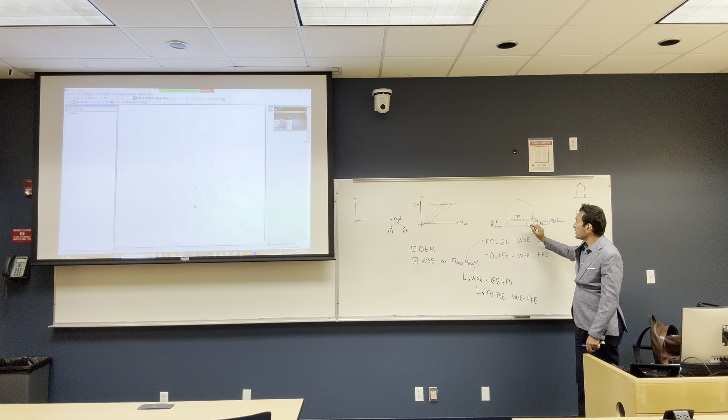But if the building has a crawl space foundation, that means there's a space here, so the ground elevation is not like the finished floor elevation. Sometimes people put mechanical systems here, like the AC unit, or the pipes and electrical systems. So there's a lot of components below the first floor elevation that you need to capture in the damage, so usually we make the flood depth measured from the ground elevation.

Okay, so if you have a crawl space, the flood depths need to be measured from the ground. But if you have a building on a slab on grade foundation, that means the FFE is the same as the ground elevation, and you can still use the FFE, right?

So this is just showing you what you should do when you do a vulnerability analysis, but the main idea is what hazard intensity are you dealing with? You have to look at the map that you are downloading - is it elevation or is it height, okay?

All right, so last time I showed you how we talked about Galveston, right? Do you guys remember? There was an island. Let's get back to it.

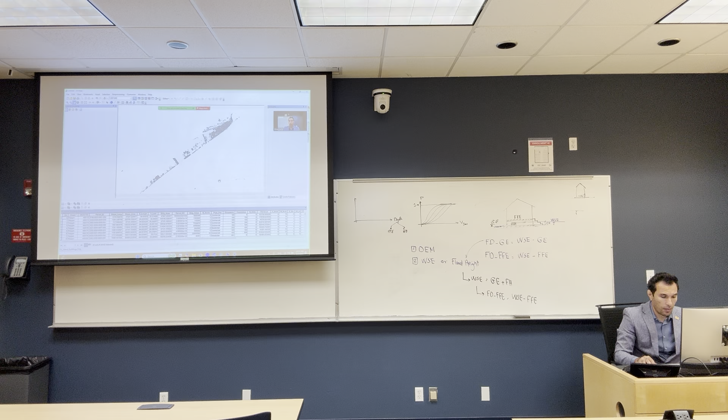Okay, so let me record this screen again.

Right, so I was about to put a base map here just to know the location of the buildings. Basically I go here and add data, and I add a base map, and I'm gonna add topographic maps.

And I was about to say that you can do the same thing with... you guys can see this, so I can do the same thing with ArcGIS Pro. I can drag and drop my shape file, so I can go here and drop my files here. Or basically you can add the data from here and choose the location of your data. So you can go here, add data, and then maybe you copy the location of your folder.

And I can come to ArcGIS Pro here and put the location of my folder, or I can browse the location of the folder, but I usually find it much easier to copy where the folder is at and put it here. And you pick whatever shape file - basically we want the Galveston Island buildings polygons, and I can say okay, and it's gonna get loaded.

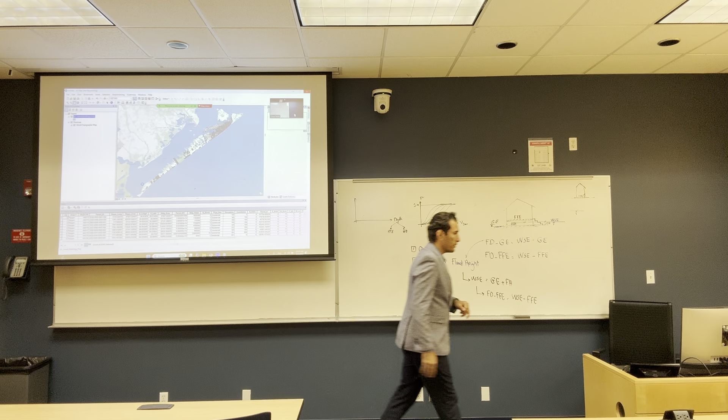Polygons are good for everything, but usually in analysis we need every building to be a single point, so that's one thing leading to a good discussion. Let's say this is your hazard map with pixels, each having a specific flood depth. But buildings aren't points, usually a building covers many pixels, and each pixel has a value. If you want an accurate flood depth, you have to account for all the flood depths around the building, if you want that level of accuracy.

But usually the pixel size, if very high resolution, is like 0.5 meter, and the building might be 10 by 10 meters or 12 by 12 meters. Some people take the average pixel value at the building and assign it to the center, but that's a lot of work. So for community level analysis, we don't have to go deep into pixel size. Instead, we convert the polygon into a point and extract the flood depth value at the center of the building, without averaging all the pixel values.

I'm going to show you right now. First, let's convert these building polygons to points. Let me zoom in, maybe here at the downtown.

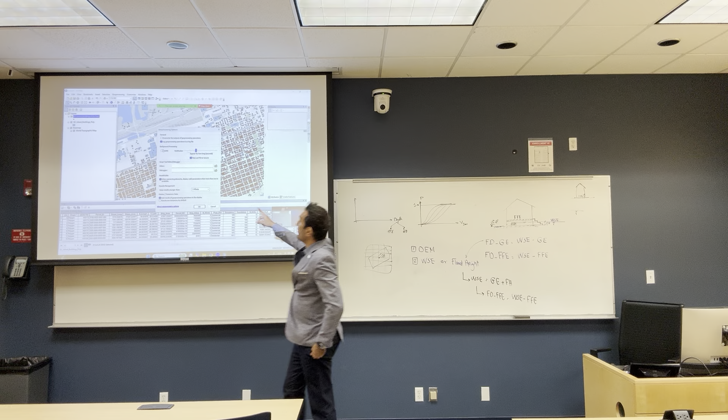If you want it to show up, go to, I believe, customize, and there's a geoprocessing option. If you click on background processing and enable it, the processing is done in the background and you won't see it, it will only show a progress bar. But I have it unchecked, so it shows me how the processing is going. So you have to uncheck enable here for it to show up.

Anyway, right now I have every building as a single point. Let's get to the hazard maps. I have multiple hazard maps for Galveston County, and these are based on Hurricane Ike in 2008.

Let's go to the raster maps. I have multiple raster maps, like one called Ike maximum flood depths. What do you infer from depth? Is it elevation? No, it's depth, right? So this flood depth is definitely measured from the ground.

The second one is called Ike maximum... why is it from the ground? Because it has depth, and depth is always measured to the ground elevation of the map, from when the map was developed. So when we have depth, it's measured from the ground by default.

Look at this one, it's called maximum flood duration, measured in hours. So depth and elevation don't matter here, it's going to be like 20-hour or 100-hour flooding.

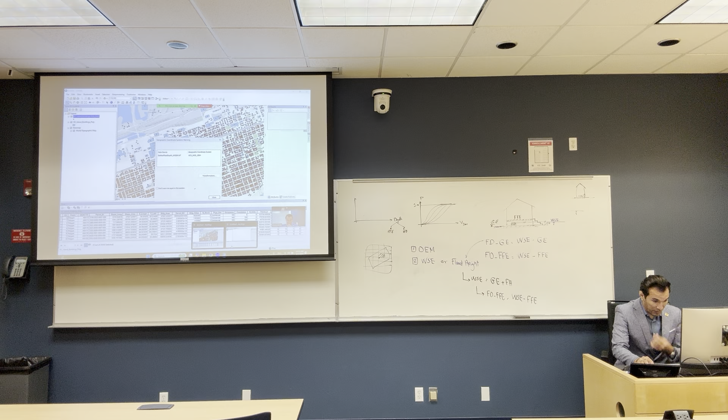It's going to take a minute to load. Let me close this so we can continue. All right, here we go.

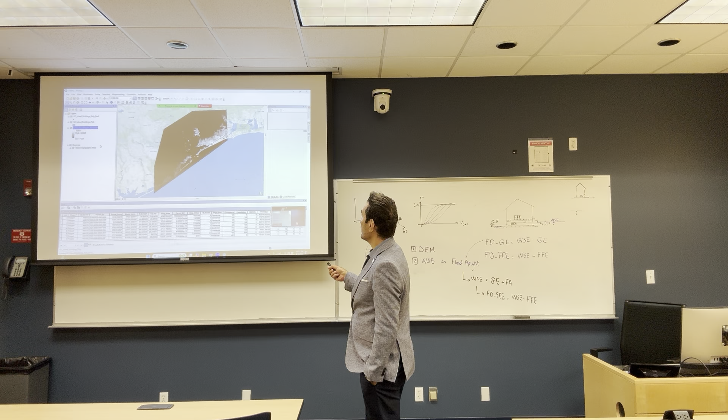Look at this, I'll zoom out to this layer and you can see the extent of the hazard map. It's covering maybe the entire county. Can you see? Here's my community in this area, and it covered this whole area. This is the boundary the coastal engineer made when they provided me this hazard map, but I'm only interested in this area.

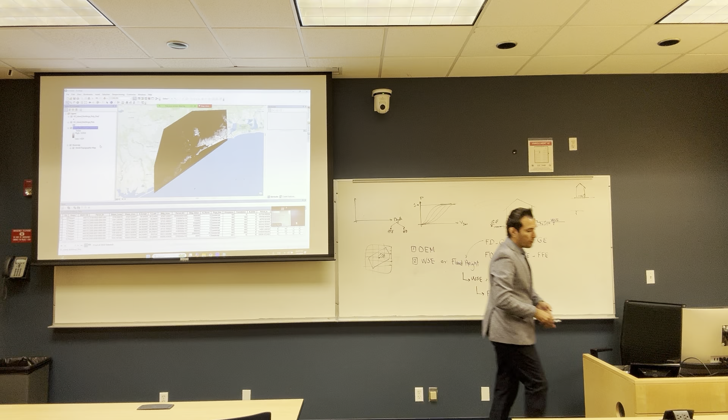It's black and white right now. When you load a raster map in ArcGIS, it always becomes black and white. If you want to change this, you go to the symbology of the hazard map. Like here, I click, and you can change it to whatever you want, like converting it to blue, which is more representative of how the flood looks.

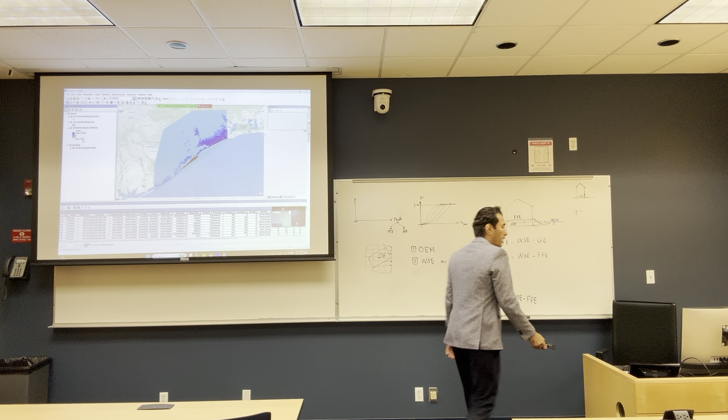The darker the blue, the more the flood depth is. You can also set the maximum flood height. So the maximum flood height is 5 meters, and the minimum is almost 0.

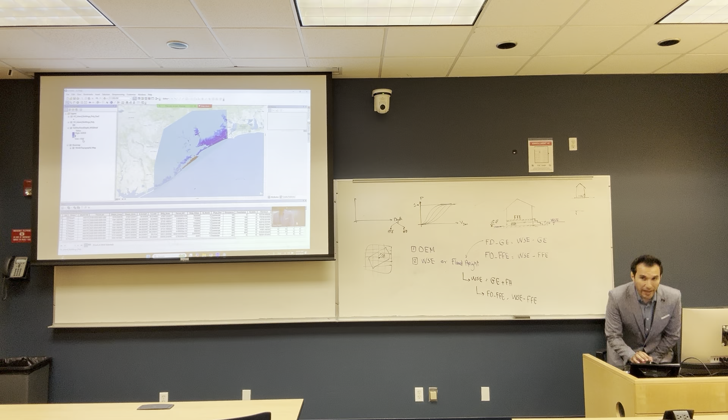Okay, so right now I have the building points, let me zoom in. By the way, my cursor right now is set to zoom in, like this tool. If you want to zoom out, you can use this tool. If you want to get back to the regular one, you can click on this one.

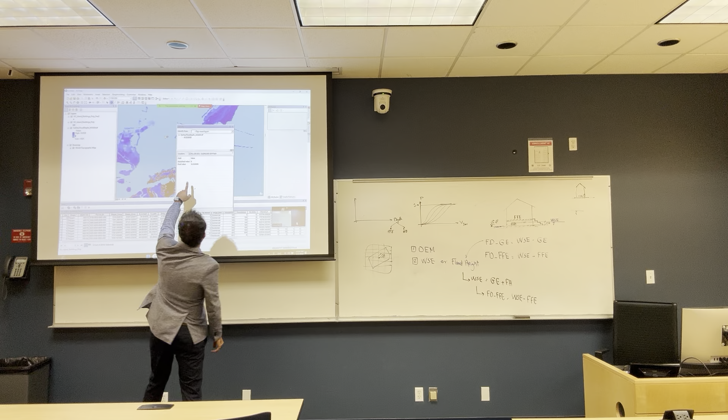There's a blue circle with an eye icon here, it's called identify. If you click on it and have identify active, clicking on any part of the map tells you the information there. Like, I clicked on the map here, and it tells me the flood depth is 0 over there. By the way, this is the flood depth, meaning this area has no flooding. If you click on a building, it gives you all the information about that building.

Let's zoom in to the downtown area, and I'll click on this polygon. Once you click on it, it gives you all the information about the polygon from the shapefile. So that's the identify tool.

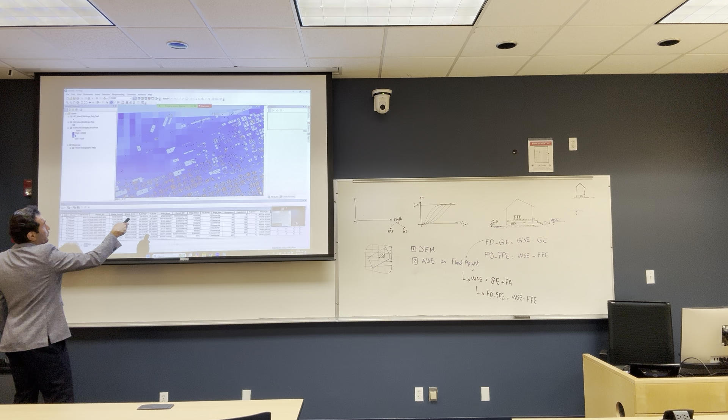If you don't want the identify tool, notice the pixels here, can you see them? The pixel is huge, a building can fit in one pixel. See this point? It's almost equally close to these 4 pixels, but when I extract the flood depth, the pixel that actually contains the point is the one that's used.

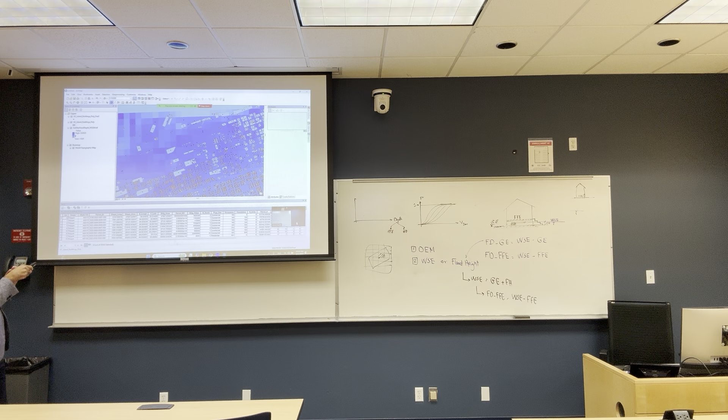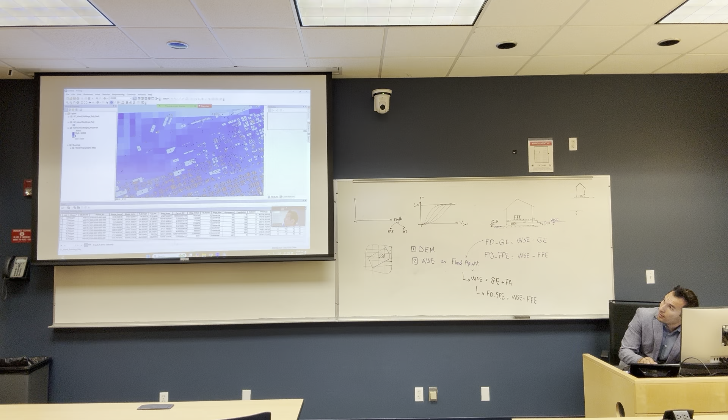So let's see what the flood depth is at this pixel. Where was I, which building? This one, right? If I zoom in, this point is in the middle between them, let's click on this pixel.

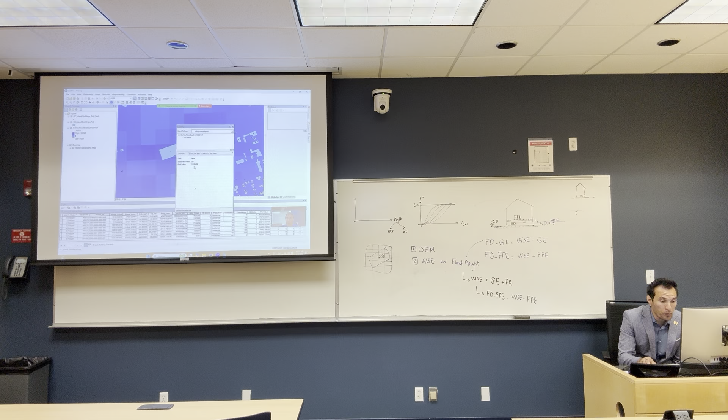This pixel has a flood depth of 2.49. This pixel has a flood depth of 2.51. So it's almost a 0.02 difference. This hazard map isn't 100% accurate anyway, so we can't demand that level of precision. It doesn't matter much whether you extract from this pixel or that one.

Okay, so let's say I want to extract the flood depths. I'll go to the shapefile and open the shapefile of the points. The last field in that shapefile is this one. When I extract the flood depths, it's going to add another field.

So I'll go to the search bar and type 'extract'. You'll find many tools you can use. If you want to be specific, I'll search 'extract point'. There's something called extract by point, extract values to points, and extract multi-values to points. What we want right now is to extract a value to a point.

If we want to extract multi-values, that means you have 10 raster maps and want to extract the value of each map to a point. For example, if you have a 1,000-year event, 100-year event, and 500-year event, you have a list of maps and want to extract the flood depths for each event, so you load all these maps into this tool.

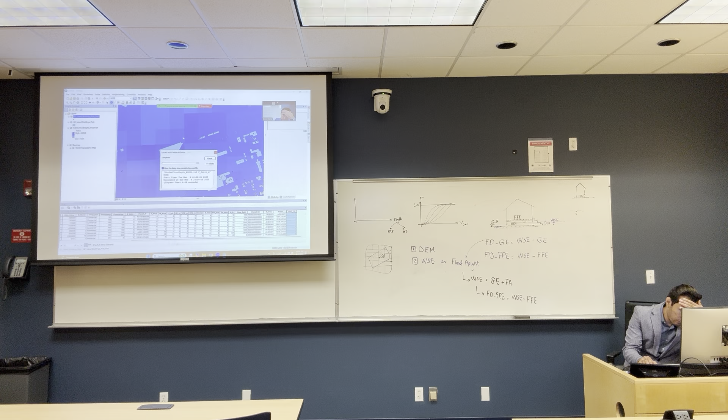Oh my god. It crashed.

I had to wait until it finished, and it finished. That's why you need to make sure to save every time you work on something, so that you don't lose the data. Anyway, let me see if I have this saved.

Get the points right away.

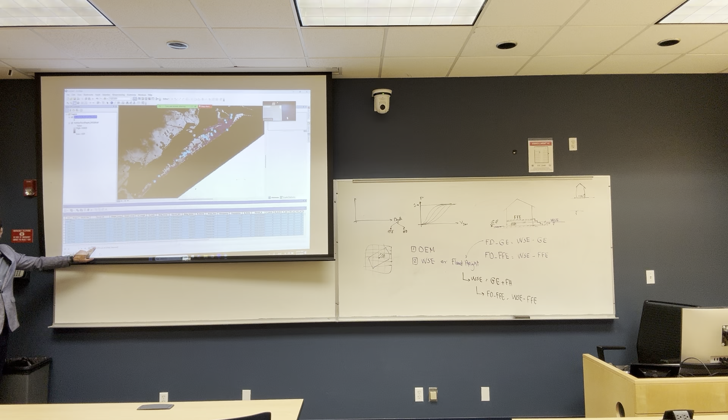Sounds like we have 359 values out of 29,000 buildings that are negative. So I select them, this one is gonna show all the data. Right now I selected 359 buildings. This one is gonna show only the selected data. So this shows all the data, this shows all the selected data.

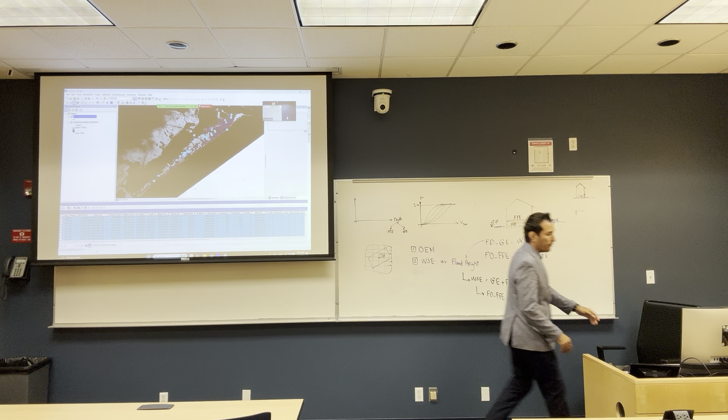So now I can take these selected buildings and change their values alone without changing all the values of the other data. So for this selected data, I go all the way here. If you scroll down, you'll find that all of them are negative values.

So you can click on this field right like this and right click and use something called field calculator. Field calculator lets you take these values and make all of them equal to 0. And then I hit OK. So right now I changed the values that are negative and put all of them to 0.

Now I can go back to all values and deal with the flood depths that I have. So I can go back here. If you want to unselect or clear the selection, you click on this one. So right now I have 0 selected out of 29,000.

Alright, so let's rank them from the highest to the lowest. The highest value is 3.47 meter. Okay, so right now I have the flood depths. Let me go here, I will find something called FFE, the finished floor elevation, let me see if it has values. It doesn't have values.

Here I have something called the foundation height. Most of the data we have doesn't have first floor elevation - that's rarely found. You will rarely find any counties in the US that have first floor elevation data. They have ground elevations, because ground elevation is very easy - they use satellite images and LiDAR to get it. But if you want first floor elevation, you have to go to every building and measure how it is elevated from the ground. It's a very exhaustive and intensive process for the counties to do.

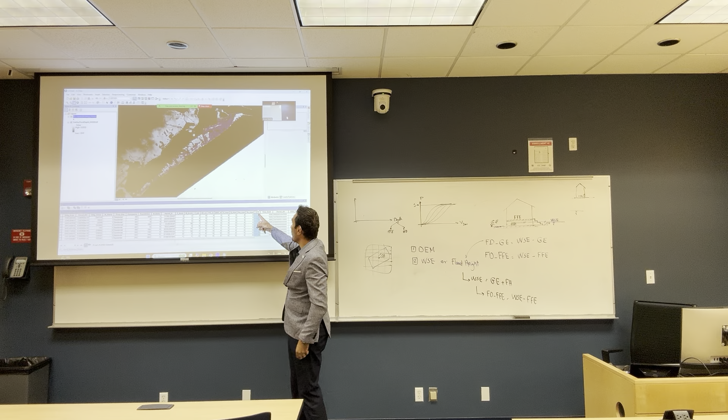The foundation height we have here is in feet, and it's inferred from the foundation type. For example, if a building is on a slab-on-grade foundation, we usually say it's 1 foot above the ground - if the ground elevation is 10, it's going to be 11. If the building is on a crawlspace foundation, we say maybe it's 1 meter or 3 feet from the ground. If the building is elevated 1 story from the ground, usually that story is around 10 feet. Some buildings are elevated very high. So we use these input values to find out what is the first floor elevation.

But the thing is, to do this, I need a digital elevation map. I need to know what is the value of the digital elevation map. That's very important, because if you want to find the first floor elevation, it's the ground elevation plus the height of the foundation. So we need to find what is the ground elevation.

There are multiple sources to get digital elevation maps. Have you guys heard about USGS, the United States Geological Survey? They have information about the ground elevation. Also, NOAA has information about the ground elevation.

Let's go and search - I will go to Google and search for USGS DEM, Digital Elevation Map, download. You will find something called GIS Data Download, with the National Map Data Delivery. Let's try one of these. Let's launch this software - it's called TNM, The National Map.

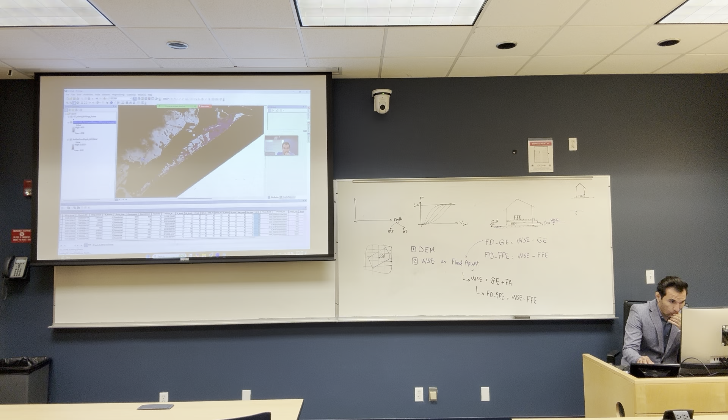If the map got downloaded - yeah, the map got downloaded. Let's drag and drop this map here and see where it is. Sounds like the map is not... let's zoom to it. Where is it? Oh, the map isn't complete, it's like at different areas of the shoreline. But I want to see where our data is. Okay, so sounds like this map is here.

And our shoreline is here, so you have to download most of these maps and try to merge them together to get the full map, which is a really exhaustive process. I believe I have the hazard map for this, but maybe not on my computer. But anyway, there's another way to do it.

There's something called NOAA LiDAR imagery, and basically it gives you data for the entire coast. So that's also another way - you go to something called elevation or LiDAR, and this shows the areas covered in the US that have LiDAR-based digital elevation maps. So I'm going to search about Galveston, Texas.

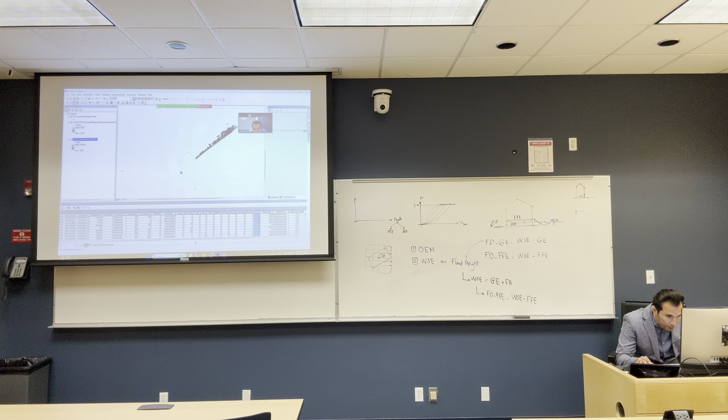It takes some time to download this map, but anyway, let's see if I have the digital elevation calculated here.

So when we import the data from the map, do we need to combine it inside the shapefile, or does it do that automatically? What is the question - when you get the data from which map? The elevation map. Yeah, from the digital elevation map that we need to download from either USGS or NOAA. It gives you the ground elevations.

Okay, and when I import it here, you put it here - do I need extra steps to show it in the shapefile? You have to extract the value of the ground elevation at each building from the map, the same way we extracted the flood heights. So it's both raster maps. One gives you the flood height, and one gives you the ground elevation. If you add them together, it gives you the water surface elevation.

Okay, but we need to do the same process to extract it. Yeah, we need to do this extraction again. But I don't have time to download a 2 gigabyte map right now - so you download them, load them, and extract them.

But here, I already have it done before, like here - the digital elevation in meters. Okay, so I have it here. Let's say that I have done this step.

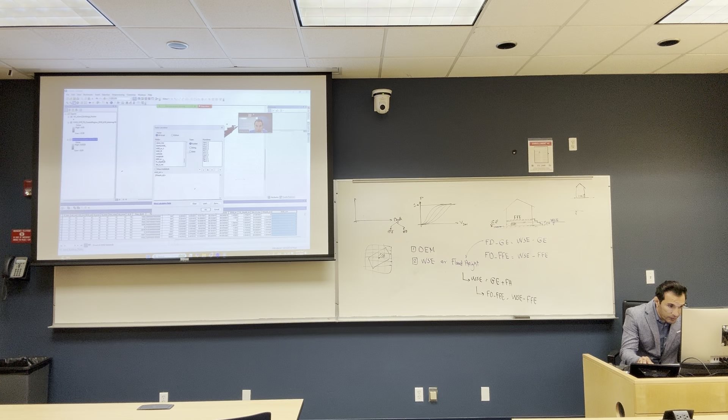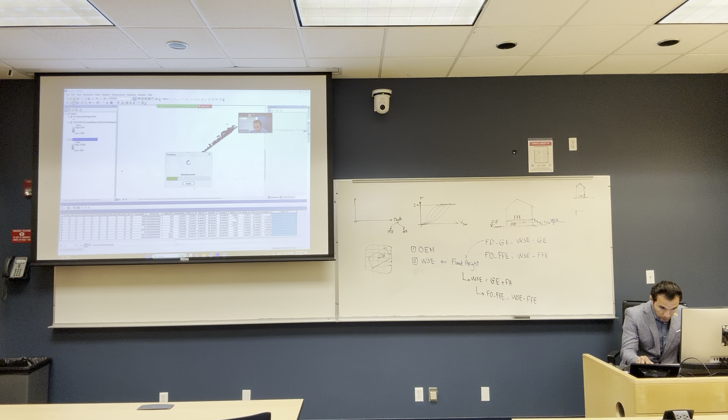If you want to find out what the water surface elevation is, I can add a field, and I'll call it water surface elevation in meters. I'll make this a double, and it says this name is already there, so let's put a 1 in front of it. Now I can say this field is equal to the flood depths plus the digital elevation. So in the field calculator, I'll say this field equals the flood depths plus the ground elevation measured from the DEM, the ground elevation. If you sum these two together, it gives you the total water surface elevation.

However, we already have a map for the water surface elevation - it's already given, the coastal engineer already developed it. You can compare what we got with what he has. You'll find that they are almost matching. This is 3.59 and this is 3.23.

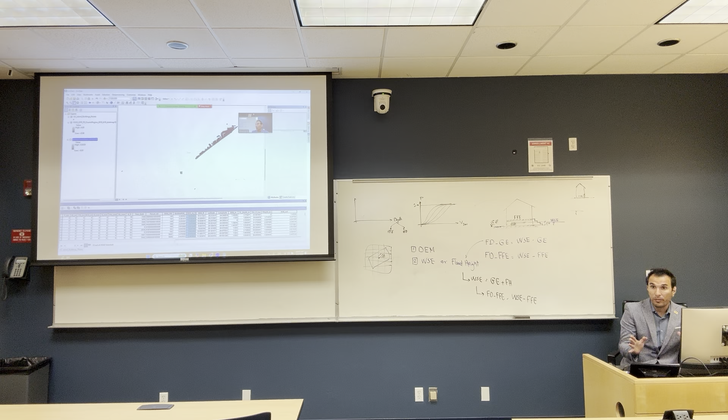This is like 2.91. Yeah, some of them are going to match, some are going to have some discrepancy, because he might use a different digital elevation model. Maybe I used a high accuracy one, maybe he used a low accuracy one, and that's what coastal engineers do - they don't use a small pixel size because they do coastal analysis for the entire coast, so they increase the pixel size. But I used a digital elevation model with a very small pixel size and much more accurate. So that's where the differences between this and this came from.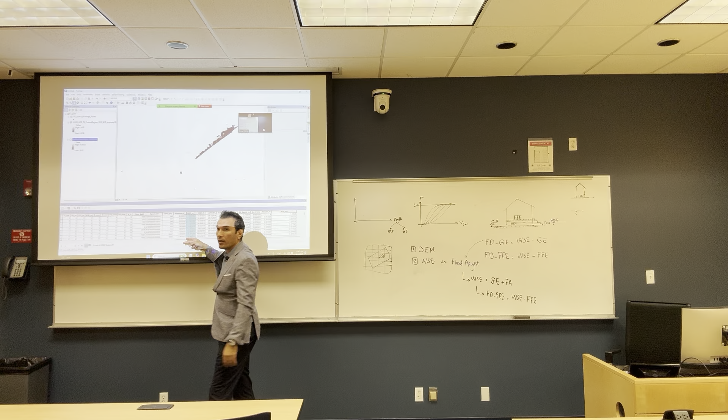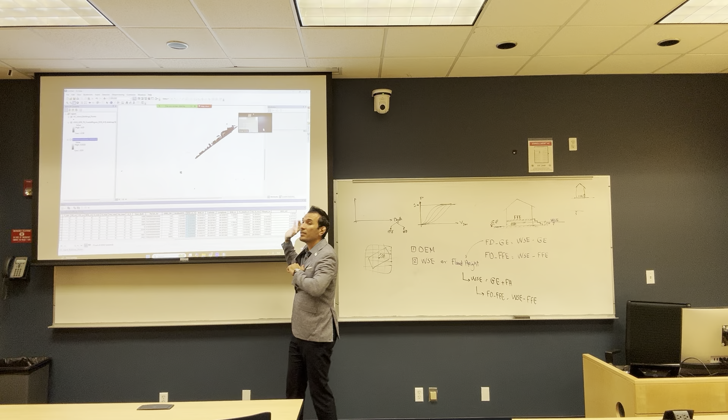This is the water surface elevation calculated from the map that was already given to me, and this is the water surface elevation calculated based on the digital elevation map that I downloaded and the flood depths that he gave me. Okay, so let's stop for now, and maybe next time we'll practice more of this.